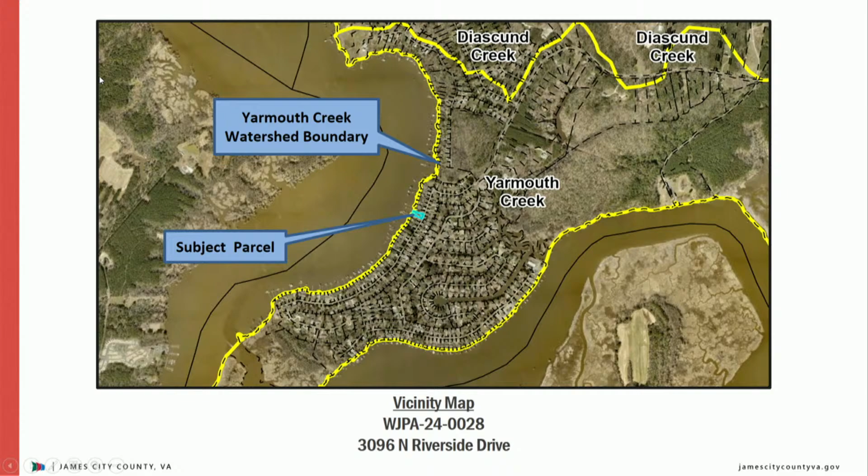Mr. Andrew Gurley of CLS Marine LLC has applied for a wetlands permit on behalf of Ms. Jackie Steffen for the construction of a wooden bulkhead on property located at 3096 North Riverside Drive within the Yarmouth Creek watershed. We have that watershed boundary outlined in yellow before you, along with the subject parcel in question in blue. And then moving in closer, just current aerial photography with that subject parcel and topography, as well as existing FEMA floodplain.

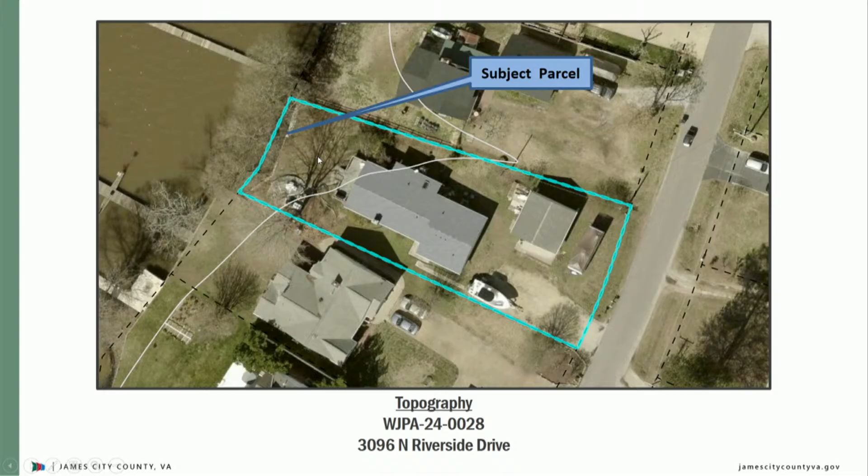Existing conditions on this site include a failed concrete bulkhead landward of various bald cypress trees within the tidal zone. Roots from these trees extend up into the yard. A living shoreline was previously approved by the board for this site at the July 12th, 2023 hearing under VMRC number 2023-0495, or WJPA 23-0007. This permit has since expired.

The previous agent expressed that an alternate approach to shoreline management, such as replacing the bulkhead, would damage portions of the cypress trees. The new agent is now proposing the construction of a 65 linear foot wooden bulkhead in the existing footprint of the failed concrete one. Based on Virginia Marine Resources Commission documents, the applicant will need an erosion and sediment control plan and a land disturbance permit, as the construction access, staging, and land disturbance is above mean high water. The new proposal was previously scheduled to be heard by the board at the October 8th, 2025 meeting.

The agent requested deferral to the November 13th, 2025 meeting, which the board granted. The agent requested an additional deferral to the December 10th, 2025 meeting to allow the agent to work with an engineer on a revised application and site plan. The new application proposes the same wooden bulkhead installation, but now includes a total of 1,376 square feet of disturbance within the resource protection area. Staff will be requiring a surety of $3,000 to guarantee the replanting of the disturbed RPA.

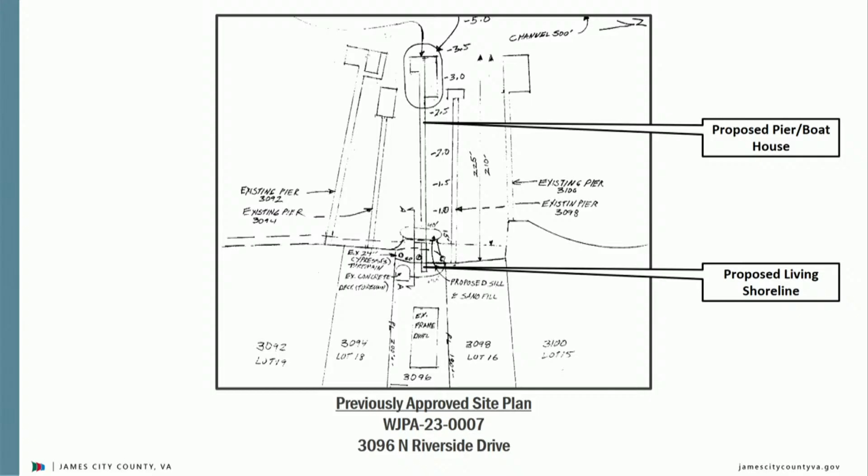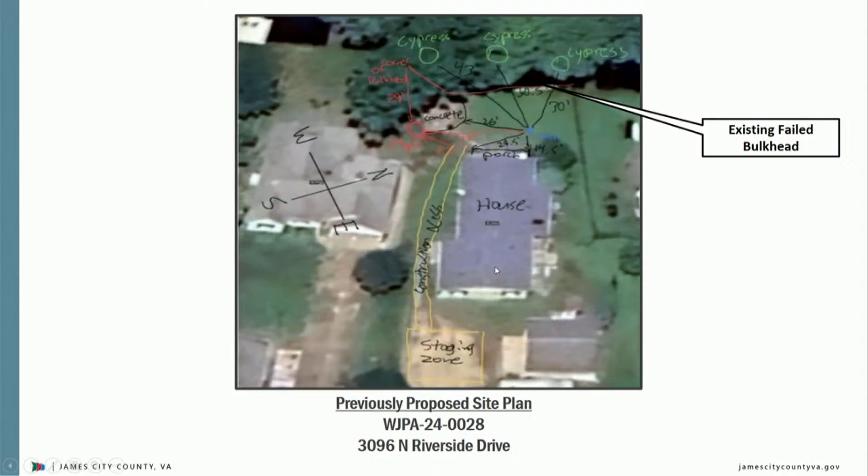This is the new site plan. We have our limits of disturbance outlined here. This is all within the RPA buffer. So again, that mitigation surety will be to guarantee the replanting and stabilization of this area. The proposed bulkhead is outlined in orange, and as you can see, it is in line with the existing footprint of the failed bulkhead. And we have about 3 very large bald cypress trees that will be protected.

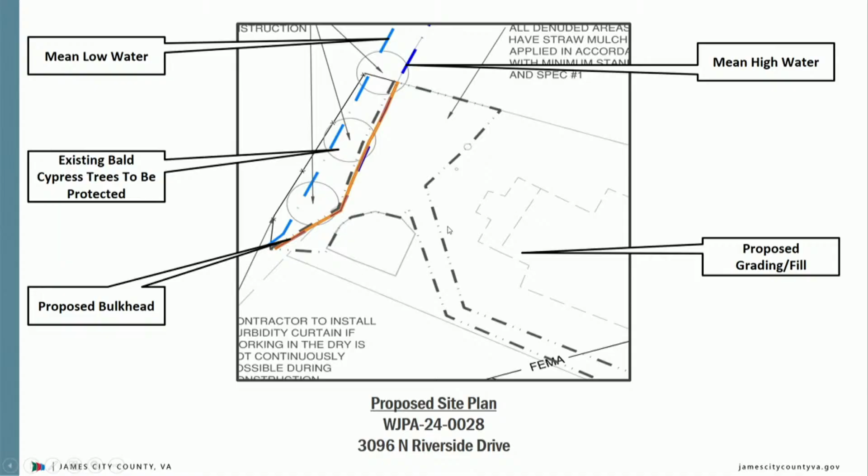The applicant in their application has proposed tree armoring to do so. And then you have the mean low water line here along with mean high, which is about on par with where that existing failed bulkhead is. And then this is just a cross-section of that proposed bulkhead. As you can see, again, it's in line with the existing failed bulkhead, and we have mean high and mean low.

They're going to be filling to bring the grade up from the existing one, shown by this kind of slope here, along with fill to grade everything out and make it even, with a drainage hole for that bulkhead for groundwater.

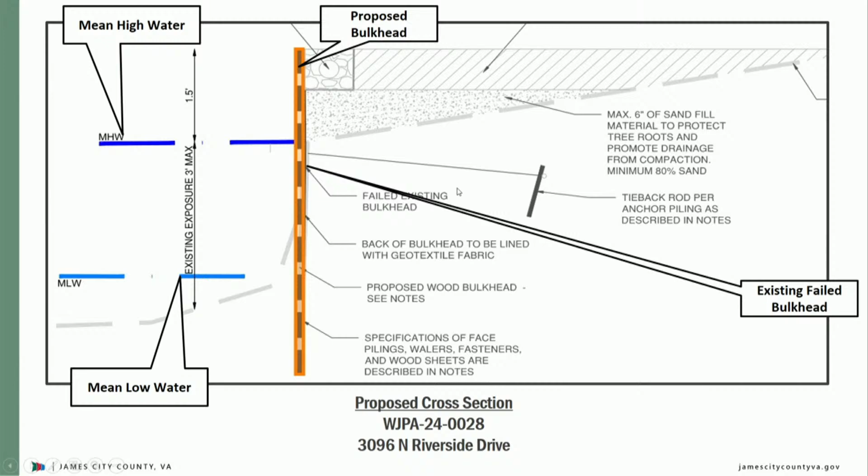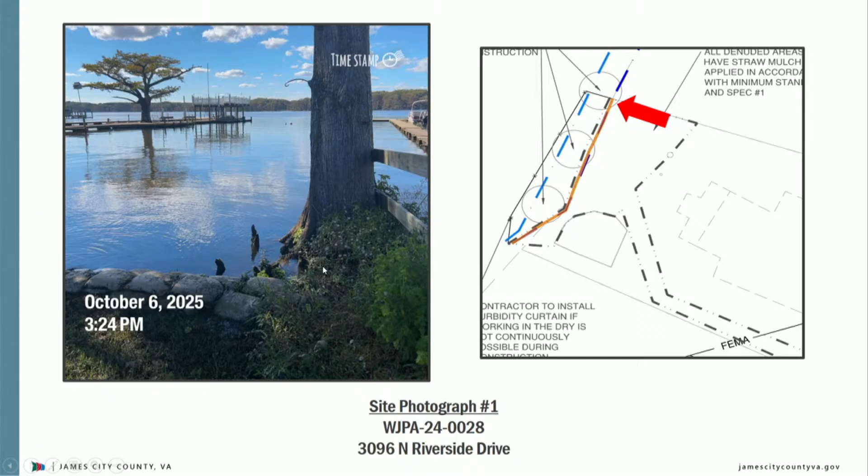Just some recent photography of the site, moving from right to left. As you can see, there are currently sandbags on top of that existing failed bulkhead, and one of those bald cypress trees that will be protected. This is at mean high water.

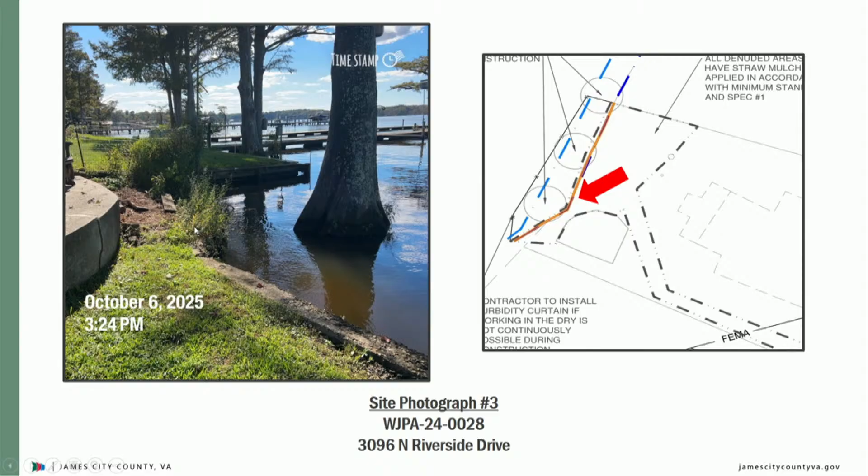Looking further left, again you see it's reinforced as best as they can with those sandbags. Moving further down, that last bit of the bulkhead is lost because it's failed—it's just sediment and plantings that have grown. Here's a closer look at that.

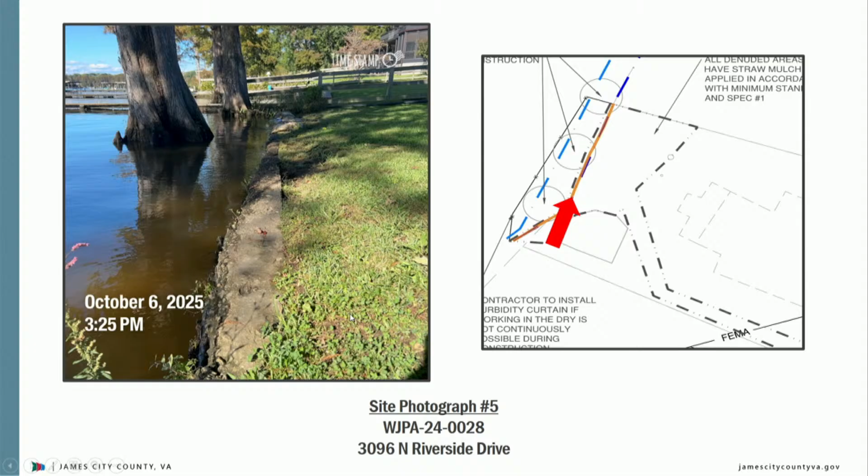And then looking back down to that fuller length of the bulkhead that's since failed. And then back showing where, if you can make it out, those bald cypress knees come up in the yard.

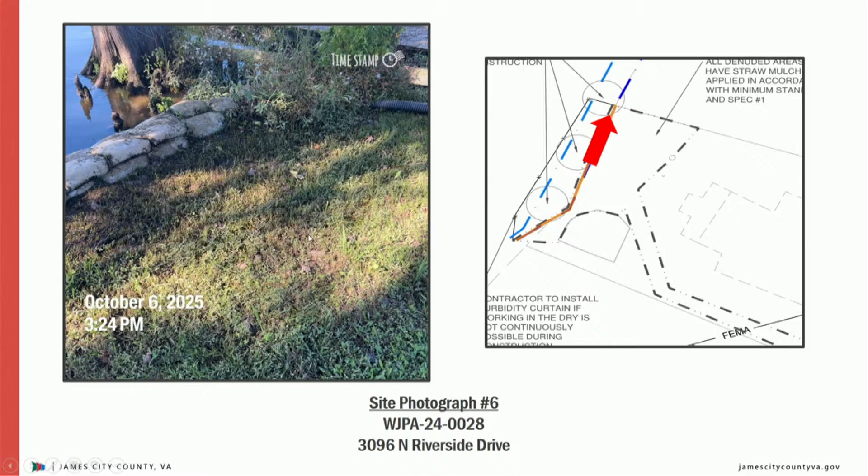On February 1st, 2025, the Wetlands Mitigation Compensation Policy of the Code of Virginia was amended. Virginia, as a Chesapeake Bay program partner, is committed to achieving no net loss of existing wetlands acreage and function in the signatories' regulatory programs. In order for a proposed project to be authorized to impact wetlands and compensate for the wetland loss in some prescribed manner, the following three criteria must be met.

All reasonable mitigative efforts, including alternative siting which would eliminate or minimize wetland loss or disturbance, must be incorporated in the proposal. The proposal must be clearly water dependent in nature, and the proposal must demonstrate clearly its need to be in the wetlands and its overwhelming public and private benefits.

If the proposed project cannot meet one or more of the above criteria, the project must be denied or must occur in areas outside of wetlands. Should it satisfy all three criteria, however, compensation for the wetland loss is required.

The sequence of acceptable mitigation options should be as follows: mitigation bank, approved in-lieu fee program, permittee responsible on-site and in-kind mitigation, or permittee responsible mitigation through off-site or out-of-kind mitigation within the same watershed. If compensation is required, it should be a condition of the permit.

Staff has reviewed this application and finds that this project meets the three criteria outlined above. Staff has reviewed the above application and recommends denial of the application as presented because a living shoreline project will work in this scenario and is the preferred method of shoreline management by the Commonwealth of Virginia.

Should the board wish to approve the application, staff suggests the following conditions be incorporated into the approval: the applicant must obtain all other necessary federal, state, and local permits, including the submittal of an erosion and sediment control plan and a land disturbance permit as required for the project. All development activities located in the special flood hazard area shall comply with Article 6, Division 3 Floodplain Area Regulations of the James City County zoning ordinances and receive all required approvals and permits prior to commencement of such activities.

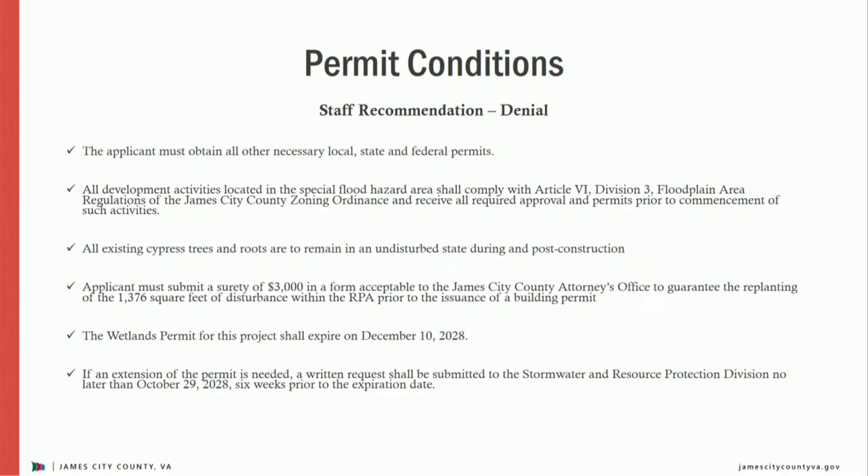Thank you, Ms. Gorgine. Any questions for staff?

Can you put that first picture back there showing the docks going out? Wait... that's our first one here.

It sure does look like the way these docks are, maybe it's deceiving the way this thing is drawn. Looks like these docks are so close together right here at the end of these piers. And I don't think that we have any jurisdiction over the piers anyway, as far as going out, it's just the land part. I don't know, maybe it's deceiving to me, but they sure look like they're running in together out here at the end of these piers.

So the previous proposal before you, they did propose a pier and a boathouse, but that permit has since expired, and this current application is only proposing a new bulkhead within the same footprint as the existing failed one. Just the bulkhead. Okay, all right, you straightened me out on it. Thank you very much.

Emily, for that bulkhead, would the existing concrete be removed and replaced with the wood bulkhead? I'm going to defer that to the applicant. Any other questions for Emily? All right, thank you, Emily.

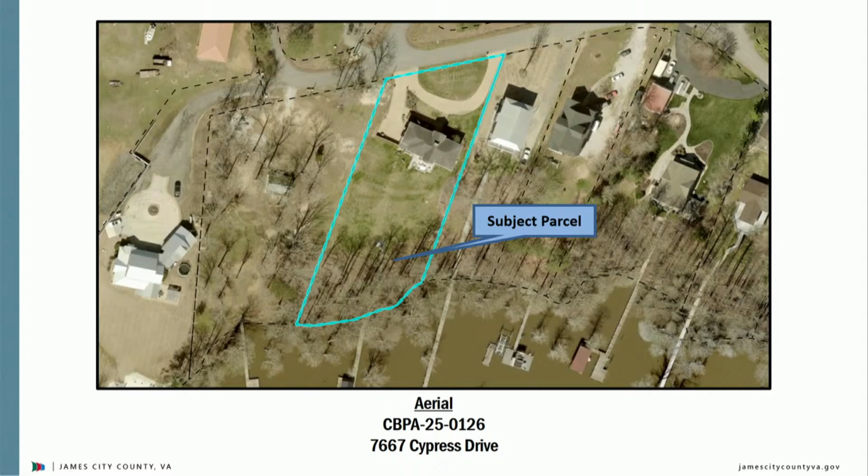So here you can see the vicinity map and aerial photography of the property, current topography, and floodplain.

The total lot size of this property is 0.84 acres, of which 56% is located within the RPA. The applicants are proposing to construct an addition to the existing home. Total impacts to the RPA associated with this proposal equate to 40 square feet of impacts to the landward 50-foot RPA. Required mitigation for this amount of impervious impacts equals half a planting unit, 6 shrubs. The applicants have proposed a mitigation plan equaling 6 shrubs, therefore satisfying county mitigation requirements.

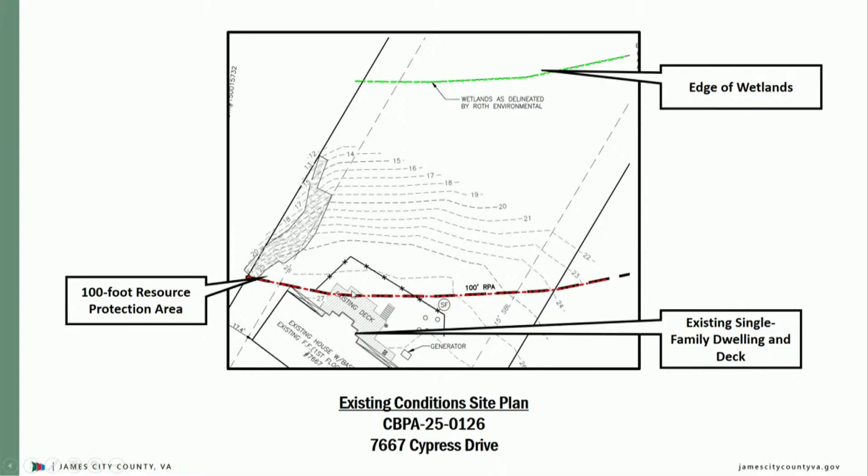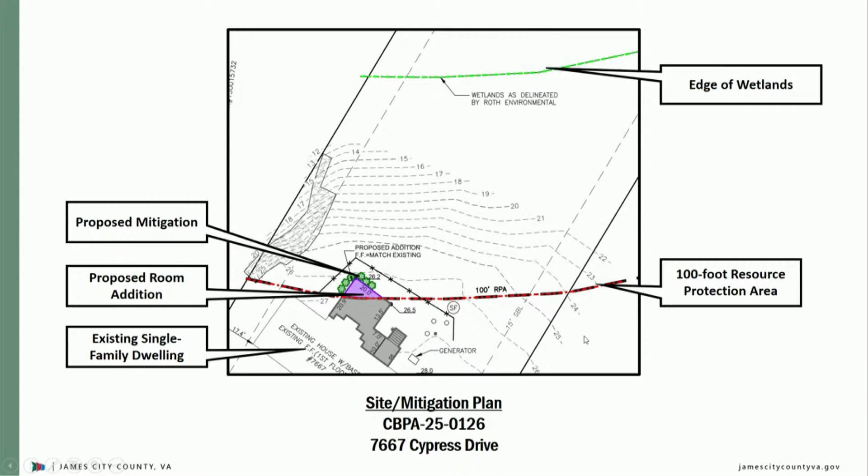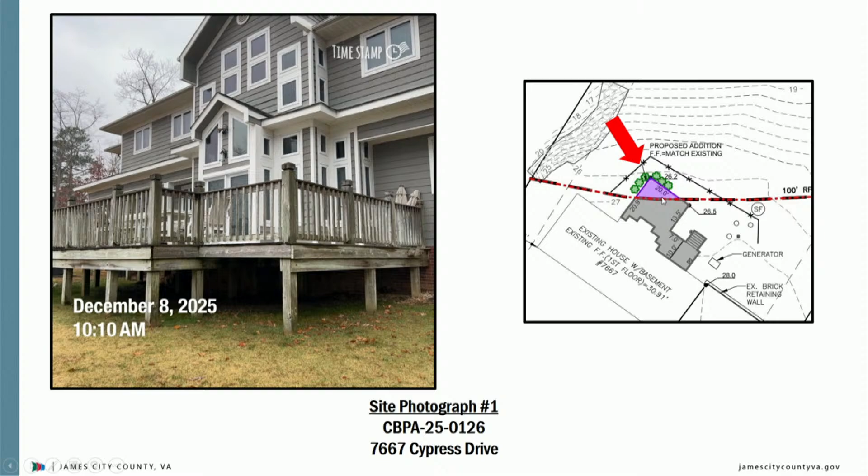This is the site plan for the existing conditions of the property. Here you can see there is an existing deck that encroaches into the RPA. They are proposing to remove that and replace it with a room addition shown here. Some recent photography of the property. Here you can see the existing deck at that corner where they'll be bumping it out slightly further, and another photo looking more this direction.

Staff has evaluated the application and exception request for the addition to the existing home. This application meets the ordinance conditions in sections 23-11 and 23-14 and should be heard by the board because the proposed addition will encroach within the RPA closer to the resource. The board may grant exceptions to 23-7 if the application meets the following 5 conditions, which you have before you.

Staff has reviewed the application and exception request and has determined the impacts associated with the proposal to be minor for the proposed development. Staff recommends approval for this exception request, and if the board wishes to approve the request, staff recommends the following conditions be incorporated into the approval.

The applicants must obtain all other necessary federal, state, and local permits as required for the project. The applicants must submit a surety of $500 in a form acceptable to the James City County Attorney's Office to guarantee the mitigation plan equaling 6 shrubs. The applicants must record an affidavit at the WJCC courthouse prior to the release of surety. This exception request will become null and void if construction has not begun by December 10th, 2026. Written request for an extension must be submitted to the SRP division no later than October 29th, 2026, 6 weeks prior to the expiration date.

I'd be happy to take any questions at this time. Does the board have questions for Ms. Frazier?

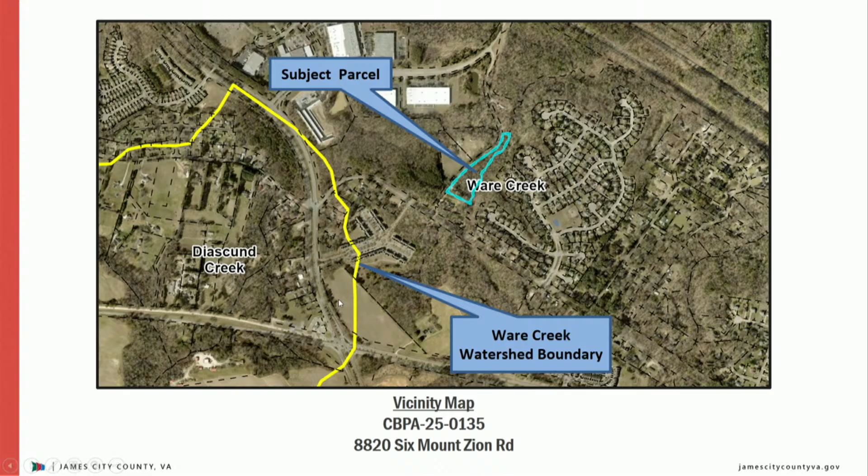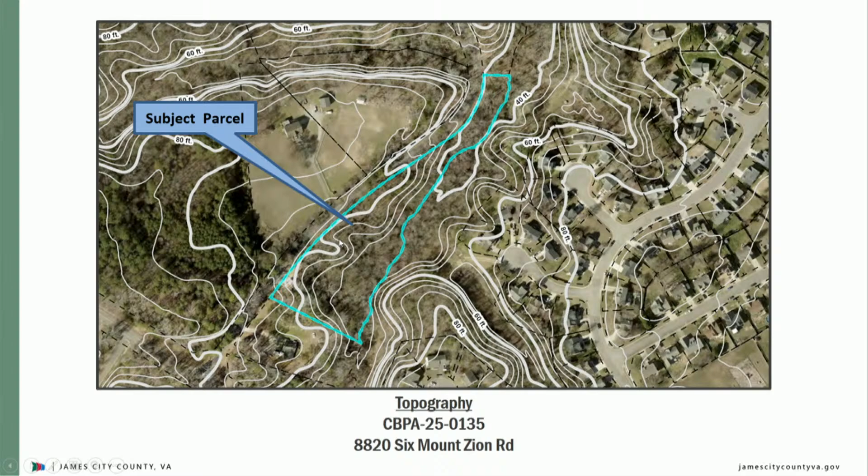As you see before you, this funky shaped parcel in blue is the subject parcel in question, along with that watershed boundary in yellow. Moving further in, you'll see shortly in the site plan, the scope of work is only taking place right here, along with the existing topography and RPA buffer.

The total lot size of this property is 2.918 acres, of which 99% is located within the RPA. The applicant is proposing to construct a detached garage.

Total impacts to the RPA associated with this proposal equate to 3,157 square feet of total impacts to the landward 100-foot RPA buffer. Required mitigation for this amount of impervious impacts equals 8 planting units, or 8 canopy trees, 16 understory trees, and 24 shrubs. The applicant has proposed a mitigation plan equaling 8 planting units in the form of 8 canopy trees, 16 understory trees, and 24 shrubs. This meets county's mitigation requirements.

So for the site plan outlined before you, the board is voting on the proposed garage and the 50 landward here in purple. As a note, all of the grayed out portions within the RPA are under administrative approval, and that would be approved concurrently with your approval of the garage. We have the setback line here in blue, along with that first 100-foot buffer, and then the 50 landward. As you can see, there's no encroachment into that except for some slight possible clearing for a proposed drain field.

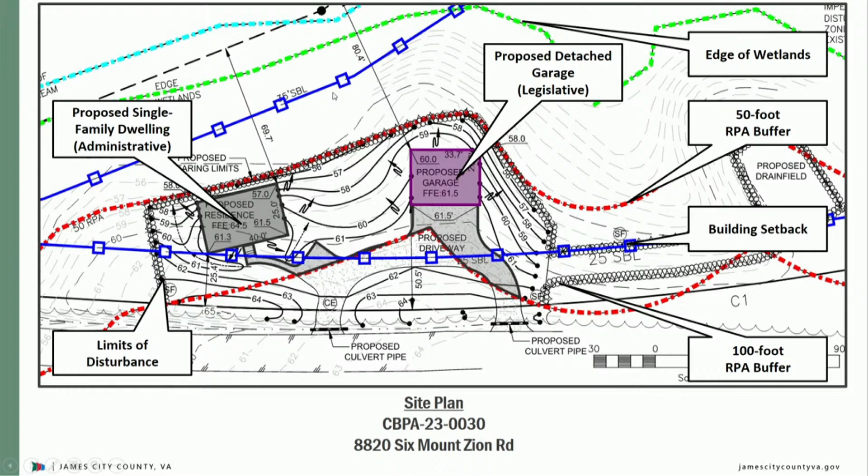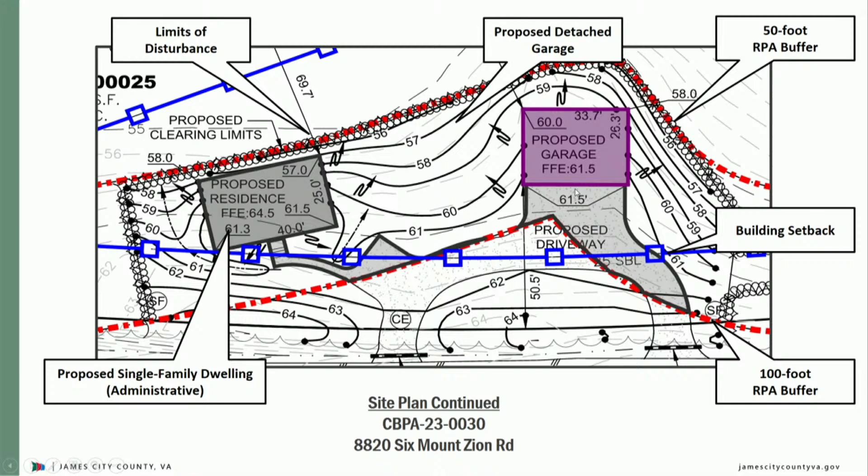As you can see, the current topography just slopes back, so it won't be encroaching on those wetlands based on the proposal. Moving closer in to show y'all better what's being proposed, we have that garage again outlined in purple, and the proposed mitigation is all outlined in green here, and that would be 8 units total.

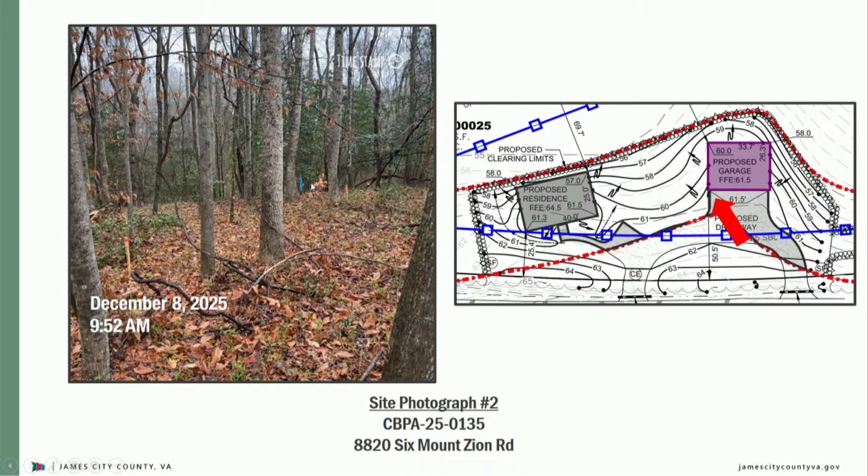Just some site photography, trying to show some staking. So we have the rough corner of that garage here in the front, and then moving closer up, again showing you that front rough corner, and then to the back there, and then that proposed limit of clearing flagged by that blue piece of tape there.

Moving again further up to show that extent of the garage in the RPA. Standing again from this corner of the proposed building, just to show you the slope and distance of everything. Excuse me, I gotta find my place.

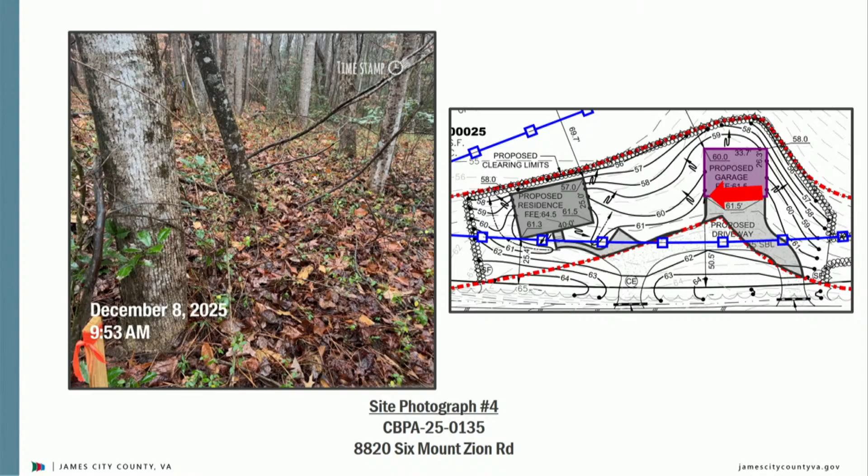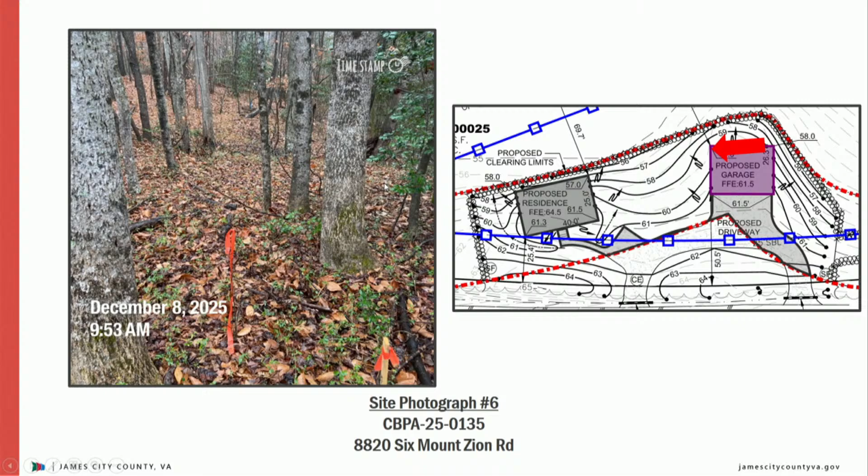Turning back to the other side, showing the opposing corner of everything along with that proposed LOD. One more showing how the slope of the property currently is. As you can see, it just slopes back there.

Staff has evaluated the application and exception request for the construction of a detached garage. This application meets the ordinance conditions in sections 23-11 and 23-14 and should be heard by the board because a detached garage is considered accessory in nature. The board may grant exceptions to section 23-7 if the application meets the following 5 conditions outlined before you.

Staff has reviewed the application and exception request and has determined the impacts associated with the proposal to be minor for the proposed development. Staff recommends approval for this exception request, and if the board wishes to approve the request, staff recommends the following conditions be incorporated into the approval.

The applicant must obtain all other necessary federal, state, and local permits as required for the project. The applicant must submit a surety of $6,000 in a form acceptable to the James City County Attorney's Office to guarantee the mitigation plan equaling 8 planting units, or 8 canopy trees, 16 understory trees, and 24 shrubs. The applicant must record an affidavit in the Williamsburg-James City County Courthouse prior to the release of surety.

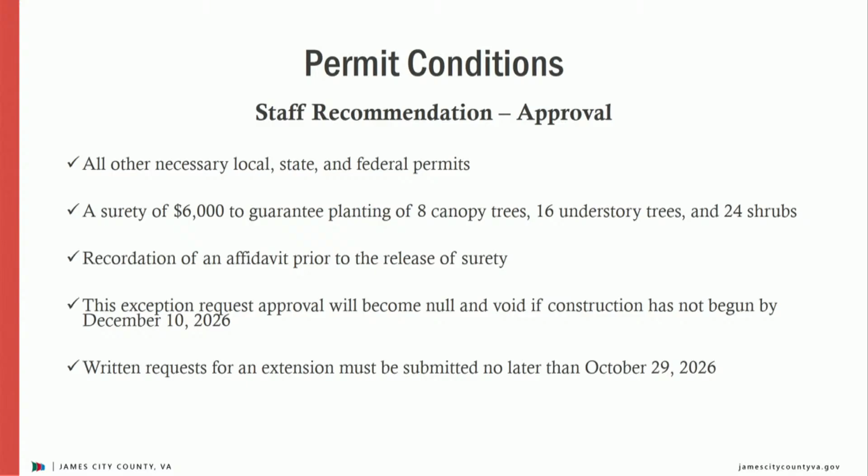This exception request approval will become null and void if construction is not begun by December 10th, 2026, and written requests for an extension to an exception must be submitted to the SRP division no later than October 29th, 2026, which is 6 weeks prior to the expiration date. If you have any questions, I'd be happy to take them at this time.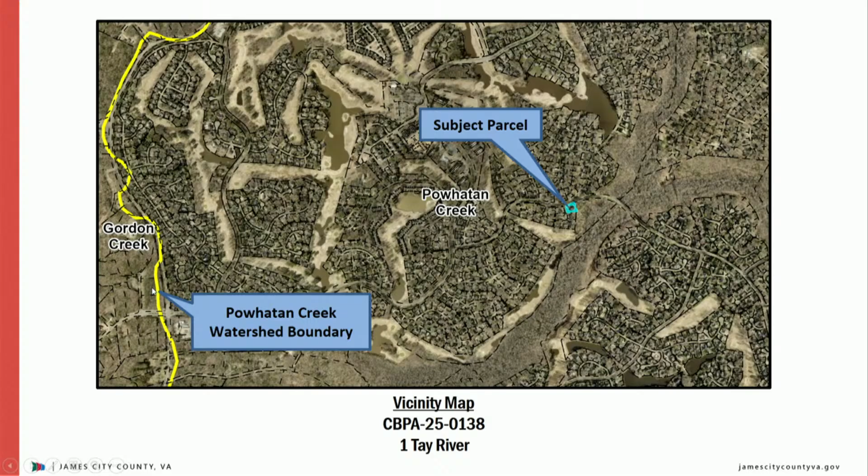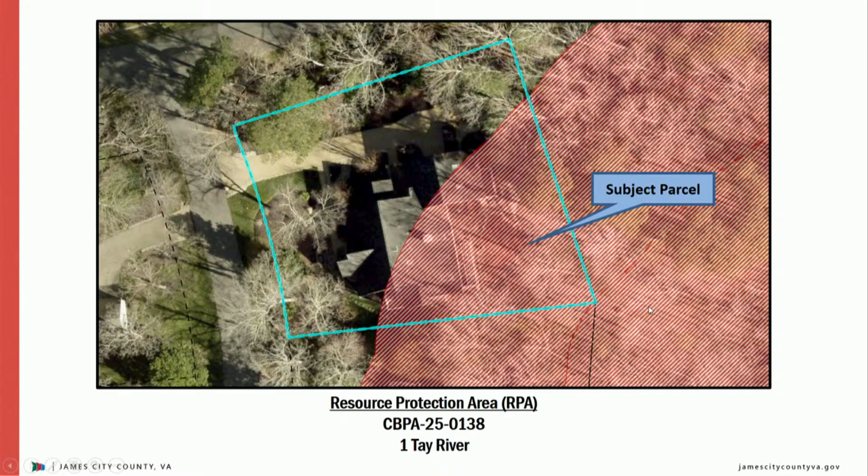In the vicinity map, you can see the subject parcel outlined in blue and the Powhatan Creek watershed boundary outlined in yellow, along with some recent aerial photography of the property showing the subject parcel, RPA, and the floodplain. Total lot size of this property is 0.46 acres, of which 39% is located within the RPA.

The applicant is proposing to construct a new deck, patio, and fire pit. Total impacts to the RPA associated with this proposal equate to 881 square feet of impacts to the landward 50-foot RPA. Required mitigation for this amount of impervious impacts equals 2 planting units: 2 canopy trees, 4 understory trees, and 8 shrubs. The applicants have proposed a mitigation plan equaling 2 canopy trees, 4 understory trees, and 8 shrubs, therefore satisfying county mitigation requirements.

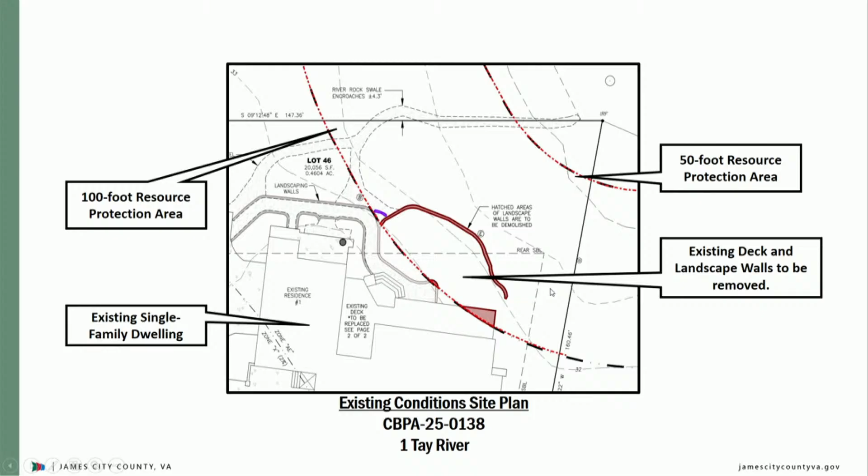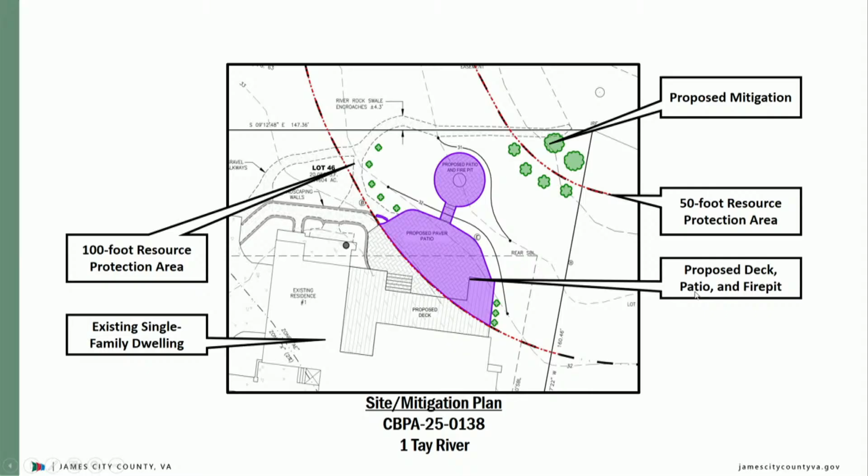This site plan shows the existing conditions, where you can see a landscape wall that is proposed to be removed, as it encroaches here, along with the existing deck, where this corner is also encroaching. They are planning to remove those and replace them with this new design, a new deck, patio, and fire pit, and the mitigation plantings are proposed in these locations.

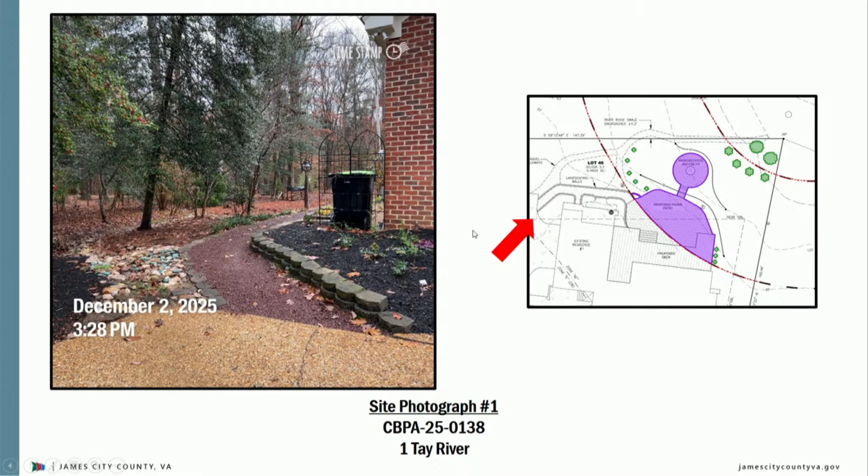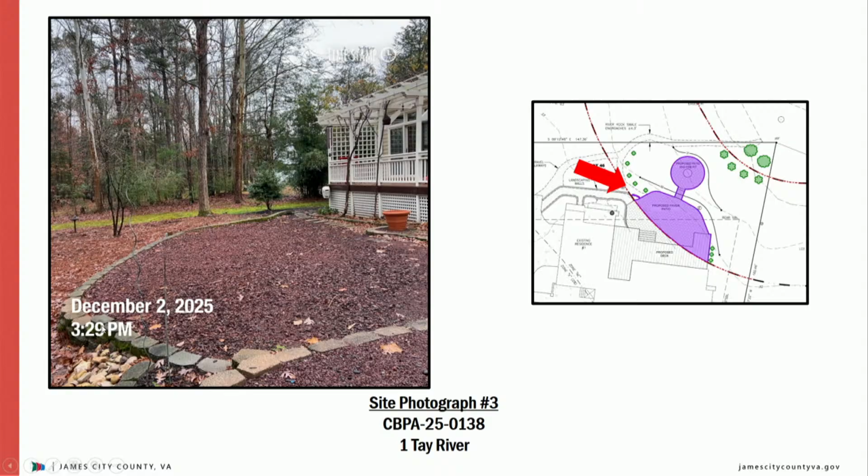Some recent photography of the lot shows the walkway coming around the corner of the house and looking out at the project area. This area is currently mulched, and they will be replacing it with the patio, removing the landscape wall and replacing it, with the fire pit and patio area located approximately in this spot.

Staff has evaluated the application and exception request for the construction of a deck, patio, and fire pit. This application meets the ordinance conditions in sections 23-11 and 23-14 and should be heard by the board because the construction of a deck, patio, and fire pit are considered accessory in nature.

The board may grant exceptions to section 23-7 if the application meets the following 5 conditions, which you have before you.

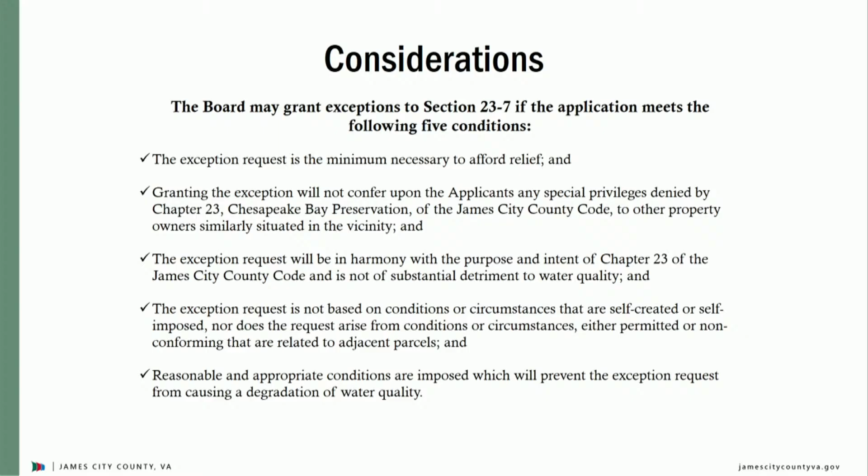Staff has reviewed the application and exception request and has determined the impacts associated with the proposal to be moderate for the proposed development. Staff recommends approval of this exception request, and if the board wishes to approve the request, staff recommends the following conditions be incorporated into the approval.

The applicants must obtain all other necessary federal, state, and local permits as required for the project. The applicant must submit a surety of $2,000 in a form acceptable to the James City County's Attorney's Office to guarantee the mitigation plan equaling 2 canopy trees, 4 understory trees, and 8 shrubs. The applicant must record an affidavit in the WJCC courthouse prior to release of surety.

This exception request approval will become null and void if construction has not begun by December 10th, 2026. Written requests for an extension of an exception must be submitted to the SRP division no later than October 29th, 2026, 6 weeks prior to the expiration date. Happy to take any questions at this time.

Any questions for Ms. Frazier? How much new impact in the RPA? Approximately 881 square feet.

Questions? Thank you.

Now open the public hearing.

Good evening again, members of the board. Chase Grog with Land Tech Resources, 205 Bulifants Boulevard, Suite E, Williamsburg, Virginia.

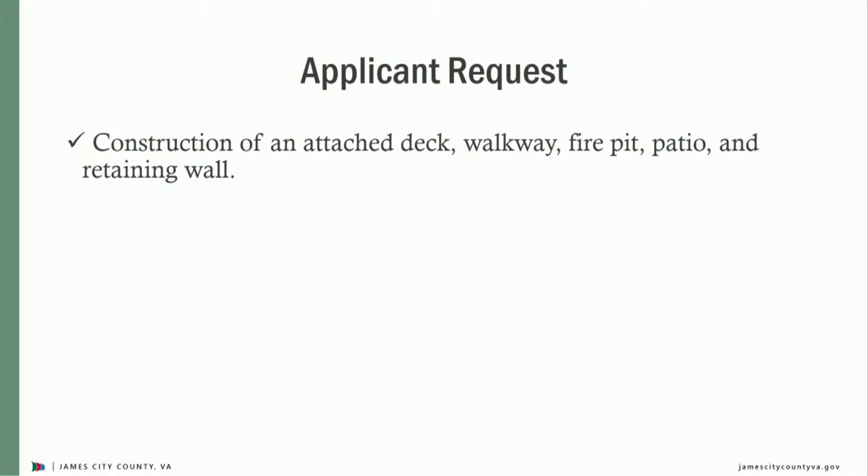Good evening, Board. Emily Grogine, Watershed Planner, presenting CBPA 25-0133. Mr. Chase Grog of Land Tech Resources Incorporated has applied for a Chesapeake Bay exception on behalf of Mr. Joby Colson for encroachments into the RPA buffer for the construction of an attached deck, walkway, fire pit, patio, and retaining wall located at 108 North Knob Hill within the Fords Colony subdivision and the Powhatan Creek watershed.

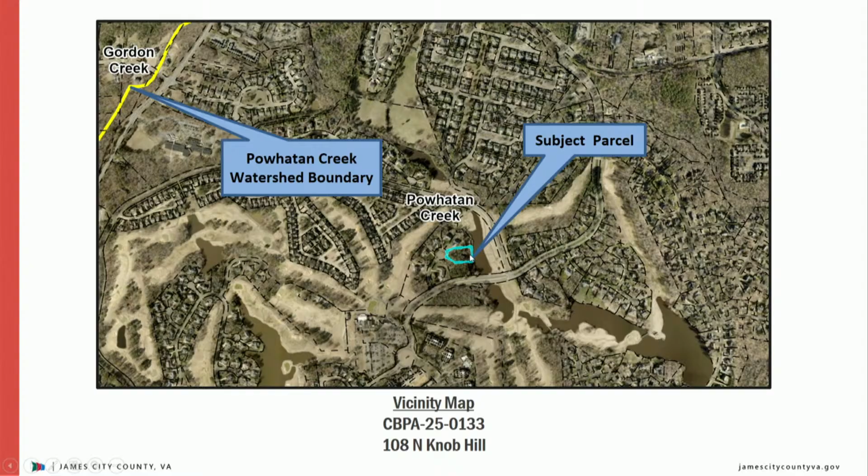Here we have that watershed boundary outlined in yellow before you, along with the subject parcel highlighted in blue. And then just moving closer in on that parcel, we have current aerial photography, as well as topography, the RPA buffer, and then the current proposed site plan. I do apologize in advance for the labeling. I try to make it as big as possible so it's visible, but then also not cover it in labels.

Total lot size of this property is 1.1 acres, of which 88% is located within the RPA. This parcel was platted in 2005 after the revisions to the Chesapeake Bay Preservation Ordinance in 2004. Due to the time of initial plat submittal and review, this parcel is grandfathered under conditions established in 1990, prior to the 2004 revisions to the Chesapeake Bay Preservation Ordinance.

That is why before you, all of what you get to vote on tonight is all in purple here, with a small sliver of the deck encroaching into that seaward 50 highlighted in orange. But the overall deck is located here to the rear of the proposed home, along with that walkway, which is raised along with the deck, and then that retaining wall here, and the patio and fire pit outlined in purple. As you can see, this lot just kind of slopes right back, with the wetland line being in green. And then we have our limits of disturbance buffed out in this little black buffer here, with some selective clearing for a sanitary sewer connection located here.

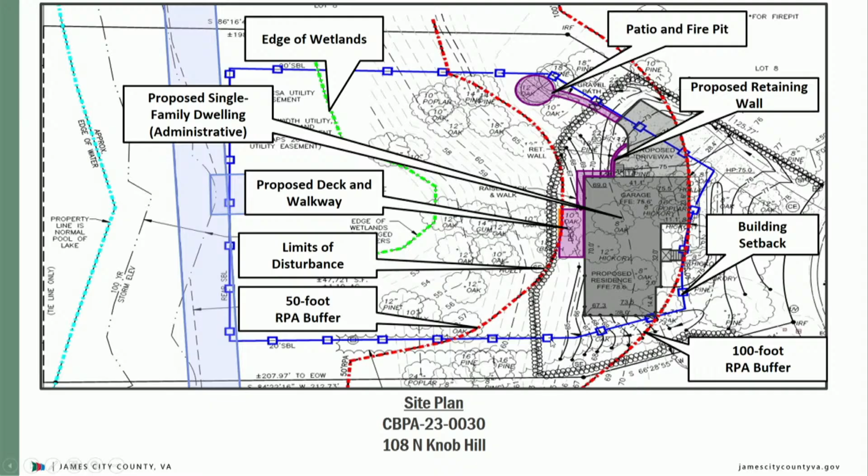Moving closer in to give you a better view of what we're looking at: again, that little tiny orange sliver is the only encroachment into the seaward 50 for impacts, along with the deck, walkway, retaining wall, and patio/fire pit here.

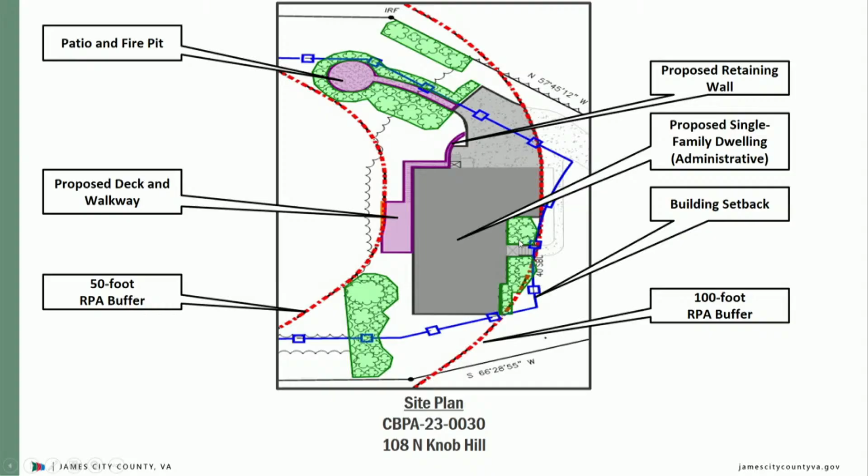The applicant has submitted a mitigation plan equaling 8 planting units: 1 canopy tree, 10 understory trees, and 64 shrubs. In lieu of planting the remaining 1.5 units, the applicant will be paying into the Chesapeake Bay Mitigation Fund. We have the proposed mitigation plan here, with all proposed plantings going in the RPA buffer, highlighted in green.

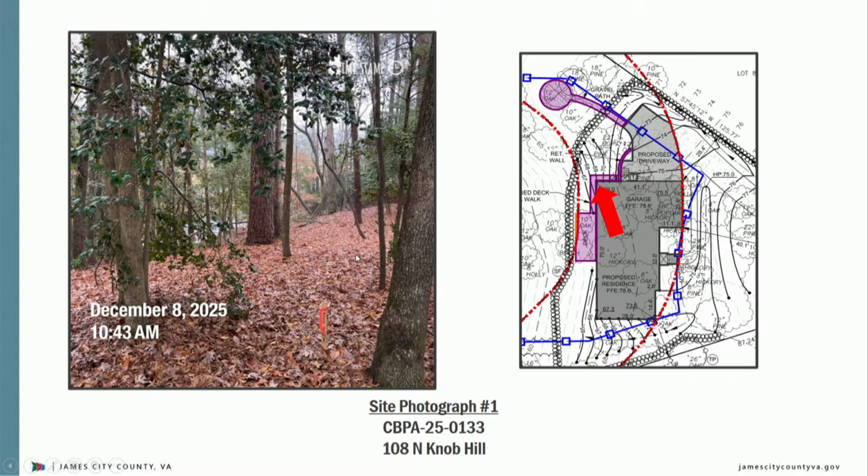Moving on to current site photos, kind of giving you the rough corner of that home where that walkway is going to be. And then to the left, that deck with the fire pit and patio kind of extending out to right about here. And then just looking at kind of the extent to that limits of disturbance and extent of the deck.

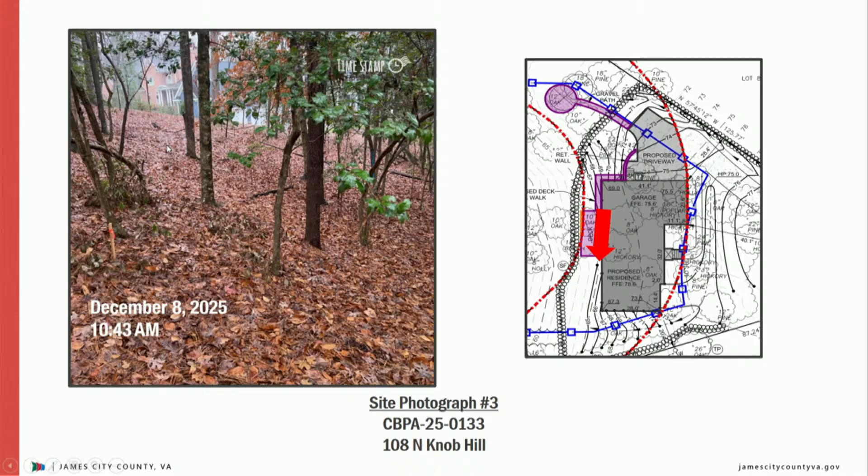And then just again, kind of looking at the extent of that proposed deck, along with an idea of the slope of the lot, how it starts in the front and just slopes right back there. And then just looking back forward to see the rough corner of that home here, along with the extent of the deck that was previously marked here.

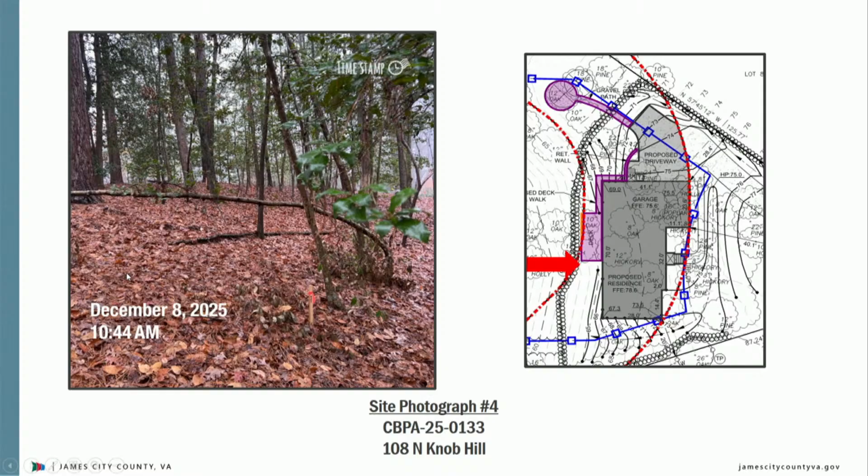Staff has evaluated the application and exception request for the construction of an attached deck, walkway, fire pit, patio, and retaining wall. This application meets the ordinance conditions in sections 23-11 and 23-14 and should be heard by the board, because the construction of an attached deck, walkway, fire pit, patio, and retaining wall are all considered accessory in nature. The board may grant exceptions to section 23-7 if the application meets the following 5 conditions outlined before you.

Staff has reviewed the application and exception request and has determined the impacts associated with the proposal to be major for the proposed development. If the board wishes to approve the request, staff recommends the following conditions be incorporated into the approval. The applicant must obtain all other necessary federal, state, and local permits as required for the project.

The applicant must submit a surety of $6,000, in a form acceptable to the James City County Attorney's Office, to guarantee the mitigation plan equaling 8 planting units, or 1 canopy tree, 10 understory trees, and 64 shrubs, prior to building permit issuance. The applicant must submit a payment of $2,000 to the county's Chesapeake Bay Mitigation Fund prior to building permit issuance. The applicant must record an affidavit in the Williamsburg-James City County Courthouse prior to the release of surety.

The exception request approval will become null and void if construction is not begun by December 10th, 2026, and a written request for an extension to an exception must be submitted to the SRP division no later than October 29th, 2026, which is 6 weeks prior to the expiration date. If you have any questions, I'd be happy to take them at this time.

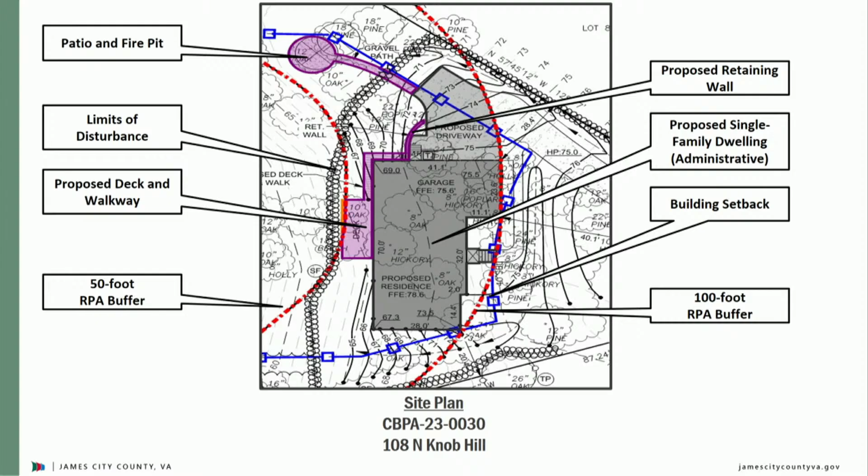All right, any questions from the board for Ms. Grudging? All right, thank you, Ms. Grudging. Thank you.

Mr. Grog, the public hearing is now open. Good evening, one last time. Chase Grog with Atlantic Resources, 205 Bulifants Boulevard, Suite E, Williamsburg, Virginia.

Thank you, Emily, for your project overview of 108 North Knob Hill. I'm here tonight representing the Colsons on their proposed home construction. As mentioned by staff, this parcel was created just as the 2004 changes to the Chesapeake Bay Preservation Ordinance occurred. When the homeowner reached out to us about the proposed construction on this lot, I advised them that a ranch-style home would be the best option for the existing topography and limitations of the RPA. They're able to achieve that design with a house that is only 41 feet deep, including the garage.

The side load garage was also selected in an effort to keep the house as far forward as possible. This allowed for the driveway to gently slope from the road to the parking pad and then from there into the rear of the lot.

While these items I just described are being approved administratively, I wanted to give some context for the exceptions we are asking for. In keeping the house shallow, it allowed for the deck to barely encroach into the seaward 50 feet. This also allows us to keep a very healthy remaining buffer between the improvements and the wetlands at the toe of the slope.

The fire pit was placed behind the driveway to the right for two reasons. The first was to take advantage of a flatter area than what exists behind the house. It also enabled us to have limited grading behind the home and focus the grading around the front. The second is to have a greater distance from the proposed fire pit to the wetlands themselves.